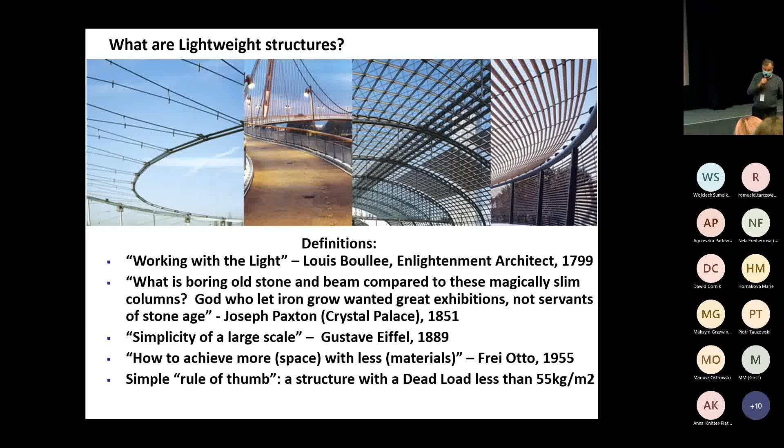A little bit of history: the theoretical paper was produced by architects in the late 18th century. The first building built with a steel frame was in 1877. Of course, there's the Eiffel Tower, built for the Paris exposition. The first building built with cables supporting a roof was in 1933, built in Chicago. And then, of course, there's a 4-point structure designed and built by Frei Otto in 1955, which weighs not even 5 kilograms per square meter.

So that was just revisiting what it means to be a lightweight structure. This presentation isn't about cable nets generally, but there are several types. This is a very simple orthogonal net where two layers of cables intersect in one plane.

Incidentally, if you look at this guy, he's not wearing any safety belts. This picture was done in the late 70s; the regulations on construction sites were a little different. Here you see the layout of the cable net prepared on the floor, on the ground, with all the nodes intersecting, ready for installation.

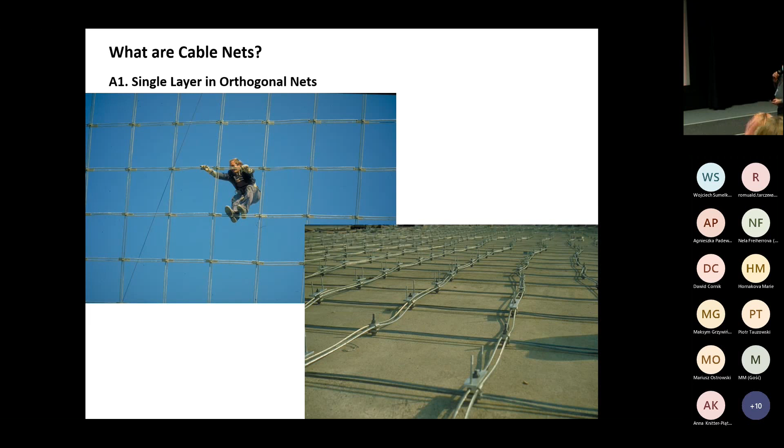The cable net, in this case, is for an ice skating rink in Munich, Germany. It is supported by a single arch, hanging from that arch, covering a space of 100 by 90 meters. That's one of the advantages of cable nets: they can span large distances with minimum dead load of their own weight and provide protection from the environment. This entire building is clad with the membrane, and it resists all the applied loads in Munich, including snow load.

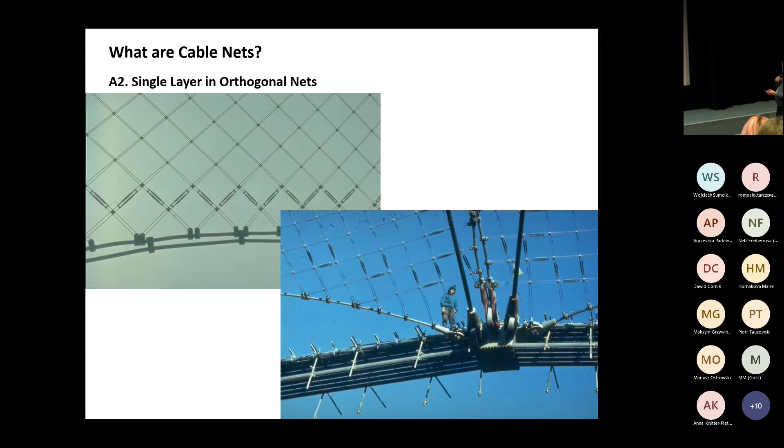The cable net could be formed, a similar concept of a cable net, but could be formed by boundaries of the catenary cables, which form totally different spaces.

Here's Munich Olympic Stadium. That was a concept design of Frei Otto, but he was not the engineer of record. Engineer of record was Schlaich Bergermann. This is the same building, shown during construction. Initially, it was clad with plexiglass panels.

What you see here, these darker lines, these are not cables. This is a joint between the individual plexiglass panels. Now there are polyethylene panels. The actual main supporting structure are these tiny cables with the upstands at the nodes, which support the roofing.

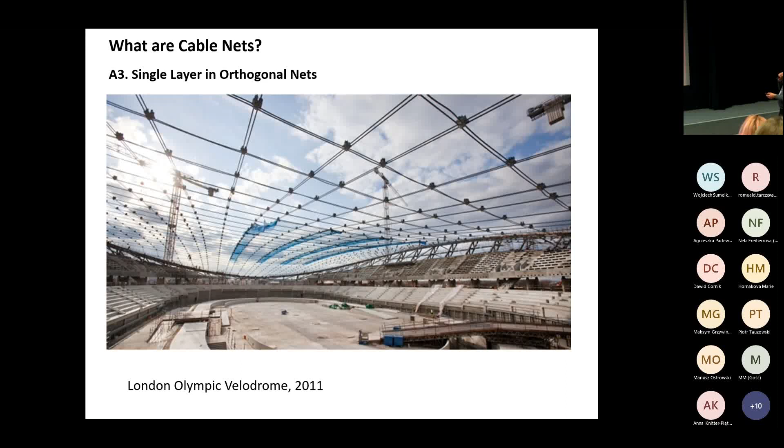Another example of a cable net, which forms a saddle dome, fully enclosed building. This is a velodrome for the London Olympics, completed in 2011. Again, you have the cables intersecting at the nodes. This is a picture during installation.

One other important aspect of any cable structure: cables have to be pre-tensioned. Cables with no pre-tension forces in them have no stiffness and no stability. What's more interesting is the higher the pre-tension in the cables, or the higher the tension forces in the cables, the more that increases the stiffness of the entire structure.

To the point that in order to reduce the deflection or deformation of the entire structure, you have to increase the pre-stress in the cables. The increased pre-stress of the cables equals the higher diameter of the cables. And then it affects the economics of the project.

So the design of the shape or form of the building, of the structure, is not the only answer to create an efficient, economical, lightweight structure, which is this example. Again, you see the intersecting cables with the node, which support the roofing. And here's the final building.

What's interesting about this one is that it was late development. The construction was late, but the date of the Olympics was approaching, and they had to build something. They had to build this velodrome.

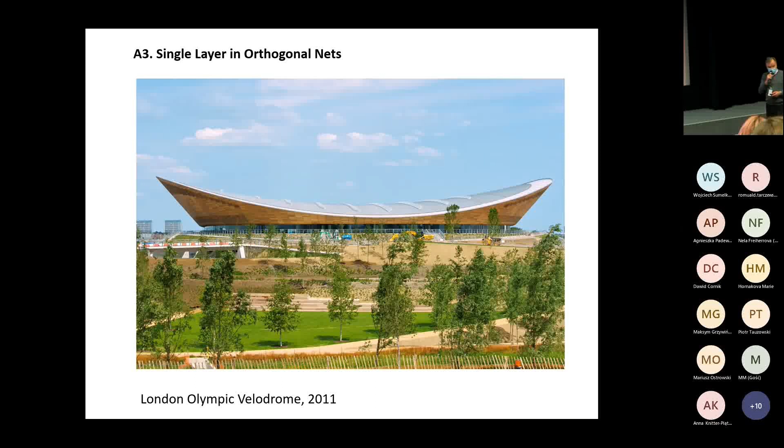The cable net, which was basically delivered to the site prefabricated and installed, was erected at one-third of the time schedule allowed for the traditional construction method, and was delivered at half price. These are the sort of pragmatic facts of the reality of life in the construction industry. Everything counts: time, money, and experience.

Here you see the picture of the inside. You hardly see the supporting structure, which are cables.

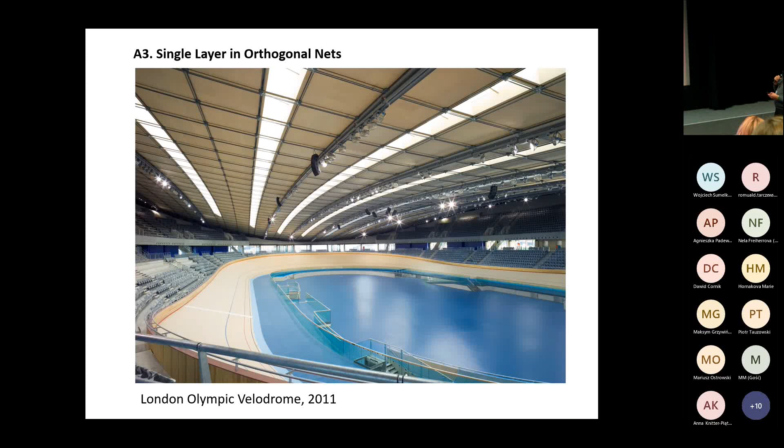It's another example. Here you have a cable net layout in a radial arrangement. It's called a bicycle wheel. It has a hub, it has the spokes, and it has a rim. In case of a stadium roof, you have a hub, you have the spokes, all working in tension, and you have a rim which works in compression.

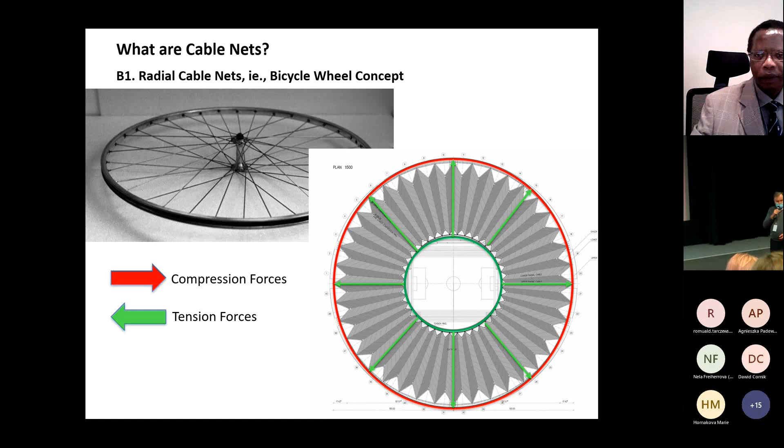If not for the wind, that would be a Tensegrity system, a large-scale Tensegrity system. Unfortunately, the wind doesn't want to blow from one direction and at one speed, and it does create reaction loads other than vertical on the system, so it's not a purely theoretical Tensegrity system.

Any applied loads, either uplift or downward, result in a different distribution of the tension loads or tension forces in the system, and sometimes very large deformations, very large deflections. For a stadium roof of the size of, say, 50,000 seats, the deformation - I'll show you on another slide.

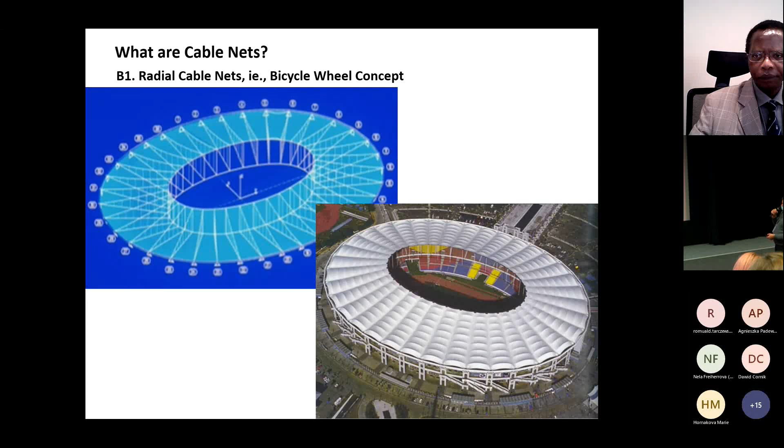Here's the system of a Kuala Lumpur National Stadium. Here's a compression ring, and here are two tension rings. This roof - there's no snow loads in Malaysia. But when the wind blows, depending on the direction, this roof deflects by 1 meter.

Here's a domestic example, Śląski Stadium in Chorzów. It's also a bicycle wheel. It has two compression rings. Here's one, and here's two, and here's the second. And this is a tension ring with the radial cable trusses.

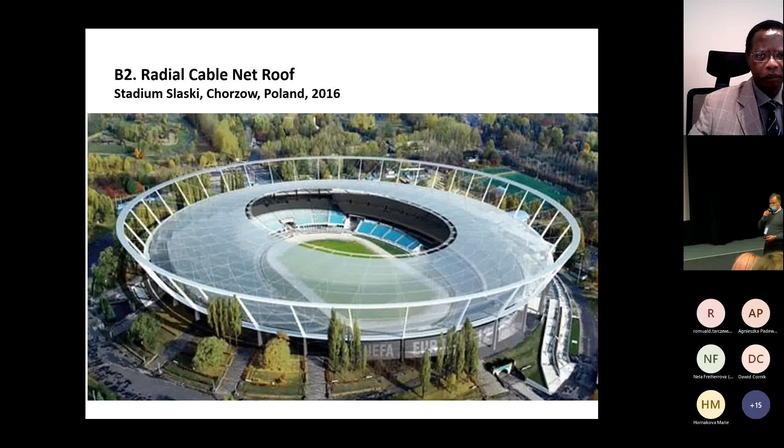This is how it was built. It actually was built twice. The second time was built right, actually. And this is after construction.

The radial cable net could also be a dome. Here's BC Place in Vancouver, Canada, which is designed with a retractable inside roof, which can carry the snow load. And the retractability, the mechanization works.

Which brings us to the subject of this presentation, which is double layer orthogonal cable net. Why is it different? The difference is that you have the top layer of cables, double cables, lower layer of cables, intersecting cables, and the struts connecting them. Such a system has the ability of carrying enormous loads over a large span.

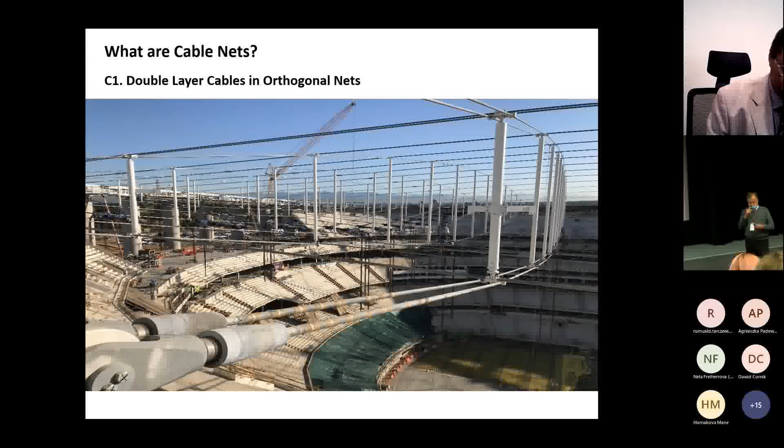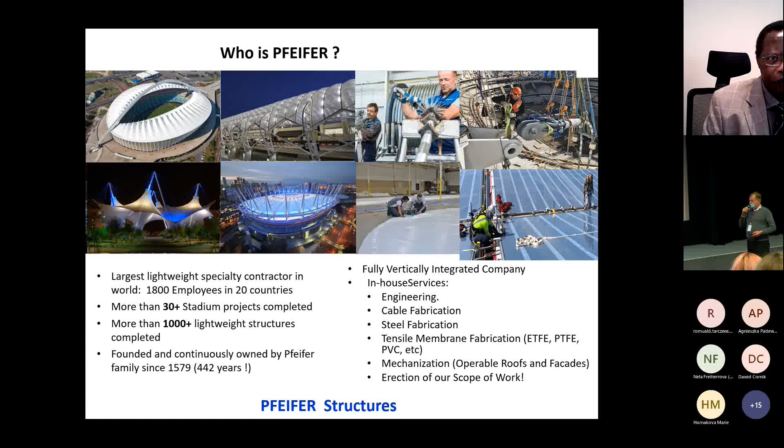And that brings us to the subject, who is Pfeifer? Pfeifer is a company who actually builds these things. Pfeifer has been building lightweight structures for 442 years. That's not a joke.

And what is the stadium? The stadium has been designed to be a center of entertainment, not just a stadium. This is located in Los Angeles, arguably the center of the world of entertainment. Hollywood is there, all sorts of film studios, and all the artists live there.

This space just over the stadium, that's a copy of an architecture model as it was designed. There's also an open plaza and the performance center for 6,000 people. Everything under one roof. This is the architecture model. This is a structural model. And this is when our company got involved and we actually were challenged with developing something that could be built.

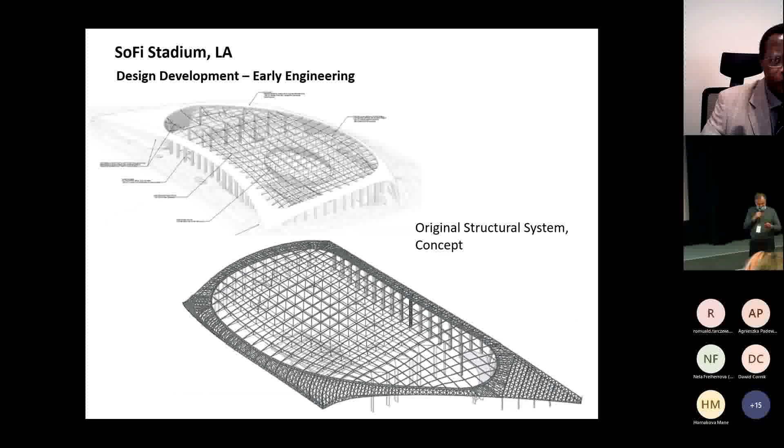So my quiz to you, my challenge to you is this. Can you tell me what the differences are between this model and this model? I'll give you a little hint. Remember what I showed you about the bicycle wheel? Okay, well, I'll wait for your answers after I finish, okay? So this is what we have built, analyzed tediously.

What adds to the challenge of this project is that it is clad with a single layer ETFE. ETFE is film. One of the mechanical properties of this film is it elongates 300% before it breaks. So if you start pulling on this film and you have a 1 by 1 meter panel, before it breaks, it becomes 3 by 3 meters. So does it snow in LA? No, but it rains. It could be torrential rains.

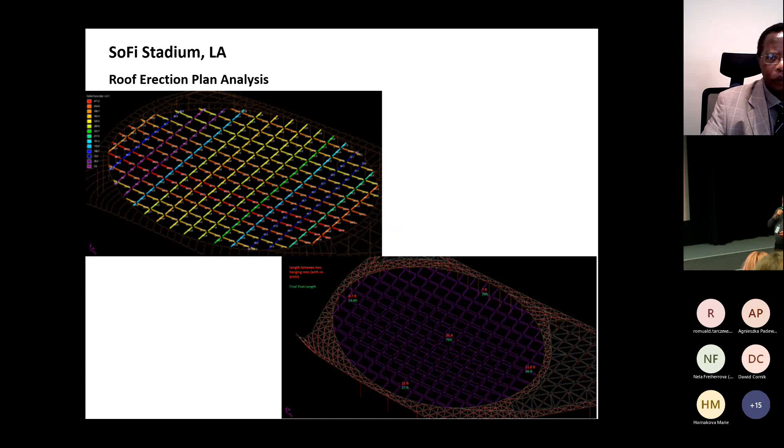Which led to the revision of the design of the entire supporting structure, which is a cable net, which resulted in a higher pre-stress, which would reduce the deformation and deflection, which resulted in higher tension in the cables, but it was a safe roof, which covers 8 hectares, I repeat. And then that leads to the detailing of the actual roofing, which is the film, the ETFE system, and the detailing of the entire roof, which of course is done again on sophisticated analytical programs, which calculate hundreds or thousands of load cases.

And then there's erection engineering. Designing the roof of any long span structure is producing the final picture of it. Now the erector, a company like ours, we need to figure out how to actually build it, how to install it and how to tension the cables. So here are examples of designing the temporary structures which allow us to lift the cables, then to pin them, and then to tension them. These strand jacks each weigh 3 metric tons, and they create forces of 1,000 tons each. These are the pre-stress forces which the cables on this structure required in order to be installed.

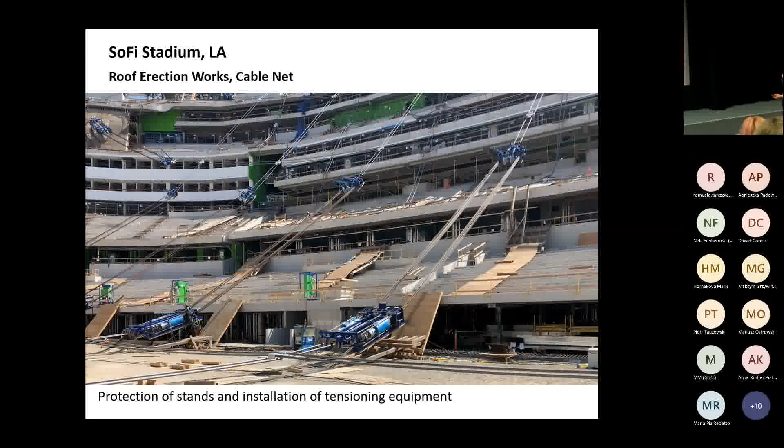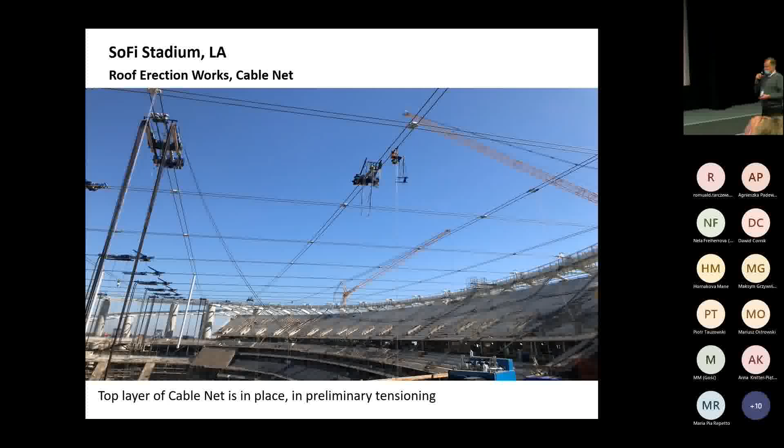The erection process starts with laying out the entire cable net on the floor of the building. As you see, the stadium is complete, it's built. Even the windows in some of the VIP suite boxes are in place. So we pin the cables. We start with the top layer because there's a lower level of tension in the top cable net. And then we install the lower cable net, and the final tensioning happens in the middle, at the tension ring. This is the apparatus which you saw in the other picture. And here's the completely tensioned cable net.

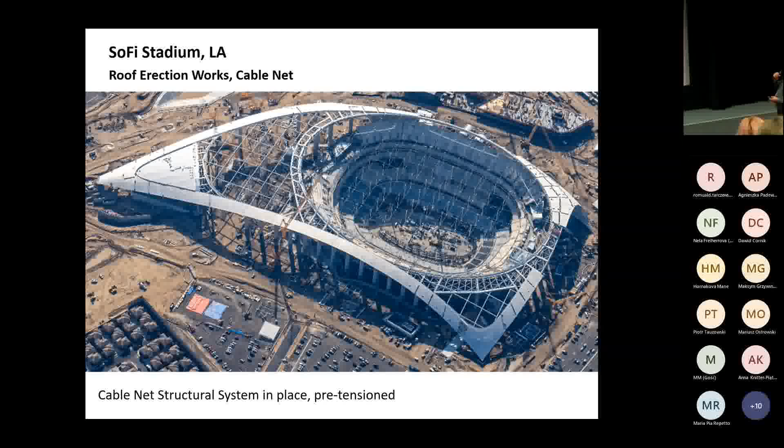Now, about the ETFE roofing system. This building is fully enclosed; it's not a dome because it's open on both sides, but because of the natural properties of the ETFE, there was a potential for huge heat buildup underneath the roof. It's like a greenhouse effect, which of course is not welcome, so it had to be eliminated. So the design called for operable ETFE panels. You see the almost 19 by 19 meter individual panels.

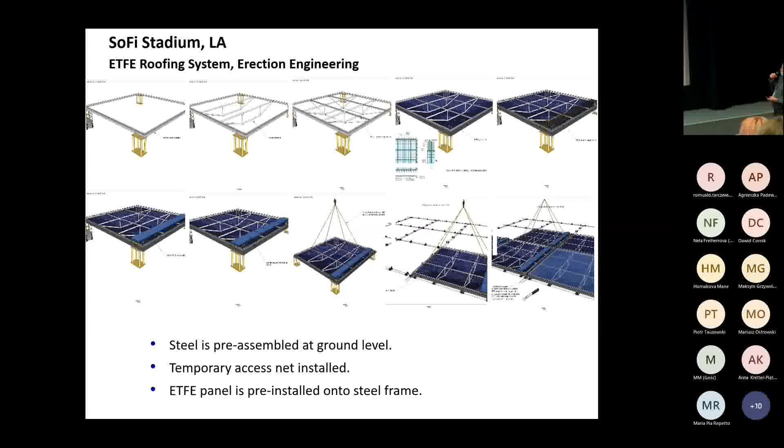Some of them had to be operable. Here is the mock-up of an individual panel. This is during the installation. And here is the mechanization of 16 of the panels, which had to open up with the ETFE on it automatically for natural ventilation, so as to prevent the heat buildup underneath the roof.

And this is how it was designed and eventually installed. And here's the stadium just before the opening game.

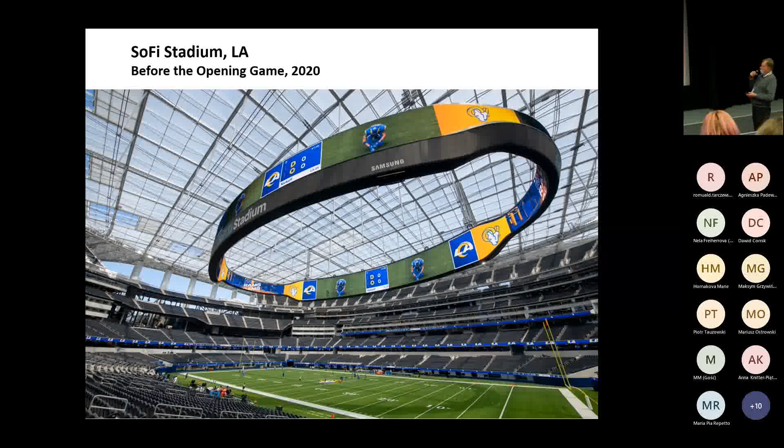In conclusion, what I would like to add to this presentation is this. We are all talking about the role of the architects, engineers as consultants on any project, starting from a small house through to a bridge or big stadium. What I would like to point out from this presentation is that the role of the builder, the executioner, the people who actually build this, can influence the design of a structure of the building, going back to square one, to the very beginnings, and presenting the need of reconsidering or revisiting what has been assumed by the designers, by the consultants.

The historical example of that, and I bring up Otto again because he is a forefather of the lightweight structures. When he started doing his models, producing models on the soap bubbles, and then started drawing them by hand, there was a person, a tent maker. His name is Peter Stromeyer in Constance, a small city at the south end of Germany, on the border between Germany and Switzerland. He was actually building this. Otto could never understand how these people knew how to compensate the material. Usually it was PVC, lightweight PVC material, to allow for the pre-tensioning during the installation and fitting the space that he had designed.

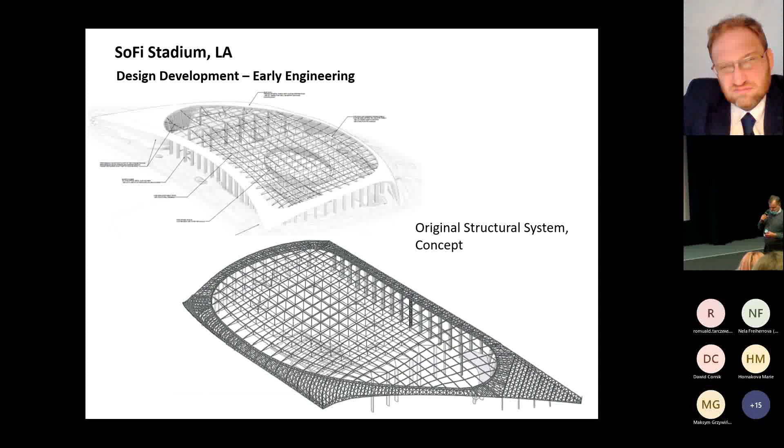The steel was failing. Why? Because there was nothing which would collect all of these tension forces, resist them in the form of compression, which is the hub of a bicycle wheel, and then would carry almost vertically. There are sliding forces, unfortunately, because of the wind, but it would carry all the resulting dead load forces to the ground through the columns. That is the fundamental difference. It may sound simple and silly, but this is what basically resulted in efficiency of the structural system for the huge roof and made it buildable. Thank you.

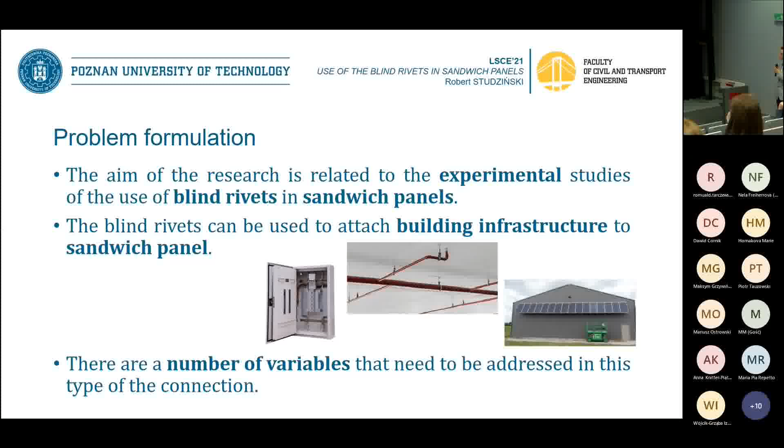So the pros and cons. The pros are ease of installation, no additional supporting structure, and no point thermal bridges. The cons: there are no practical guidelines, and there are no standard regulations so far. So let's go through the scope of the laboratory tests.

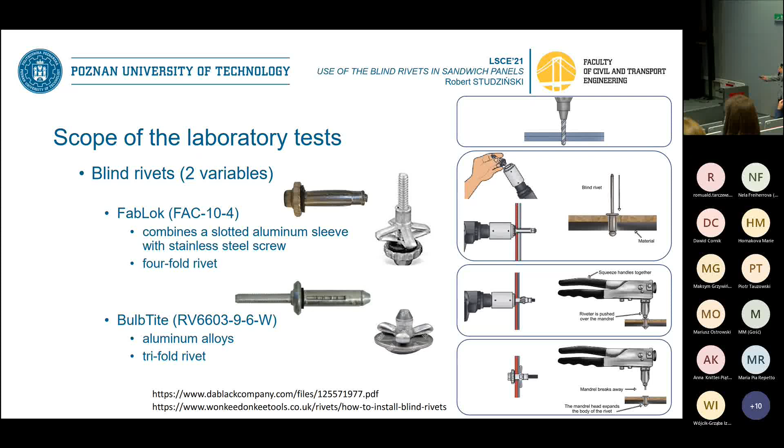I considered two types of blind rivets. They are characterized by almost the same diameter, and they are almost all aluminum, but the main difference is the number of folds. Here we've got 4, there's 3. The way of installation is quite similar. The difference is with the tools used. I mean, there is a riveter. Here we've got some sleeve on a drill or simply a hand wrench to install this FabLok. So on the right side, we've got the blind rivet. On the left side, we've got FabLok rivets.

I considered sandwich panels. Sandwich panels are composite structures which consist of 2 thin facings, with a thickness of about 0.5 millimeter, and a core which is made of soft materials with high thermal insulation properties. In the research, I investigated the use of steel and laminate. I investigated 3 types of core material: PIR foam, mineral wool, and styrofoam. And also I considered the lack or occurrence of a primer layer. The primer layer is applied at the external facings while the PIR foam is emerging. It improves adhesion between the facing and the core.

And of course, we should investigate a number of load types and load case scenarios. That's not all cases. I mean, I consider axial and eccentric load. The eccentric load was assumed by this eccentricity in the laboratory tests. Nevertheless, we should also investigate shear, but so far I didn't perform tests which will show the shear response of this type of connection.

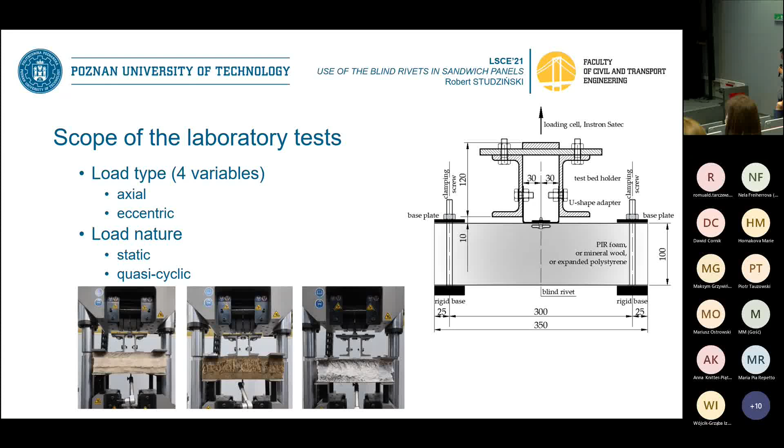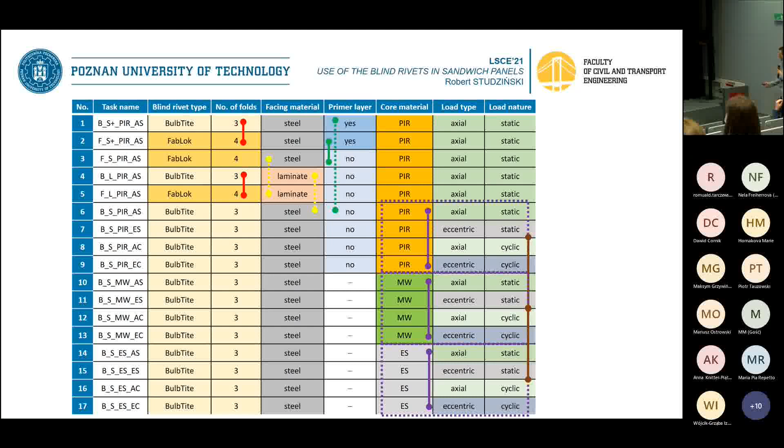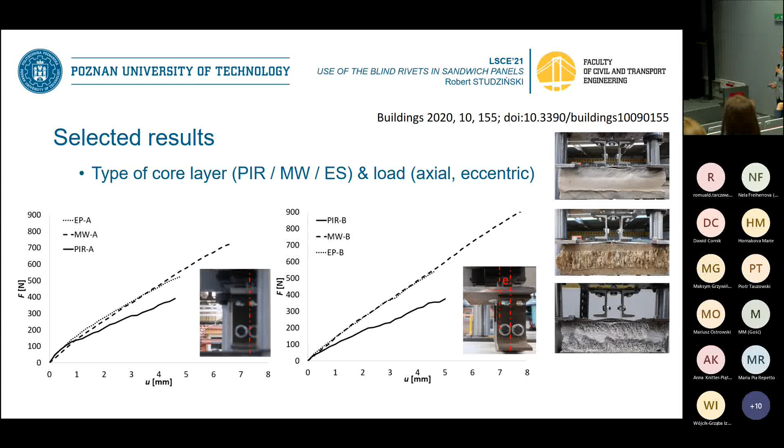Then at this slide, you see the differences between different core layers: PIR foam, mineral wool, styrofoam. It's also presented on the left side for axial pull-out, and here on the right side for eccentric pull-out. And what is observed, the angle of this load path was higher for the eccentric pull-out of these blind rivets.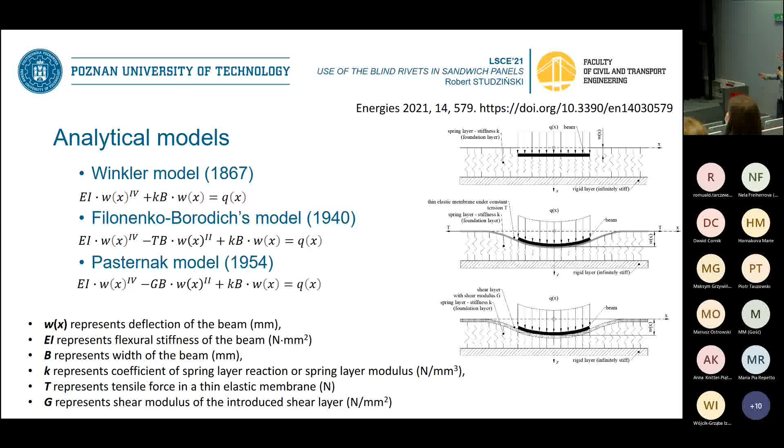And the last part of my research was connected with the analytical models. I tried to find some correlation, and I thought that I can use the simple, well-known models of beam on elastic foundation. I investigated Winkler, Filonenko-Borodich, and Pasternak model. Of course, there are some well-known assumptions of those models. Of course, I inverted this. I limited it to the point force and to the tension, not to compression.

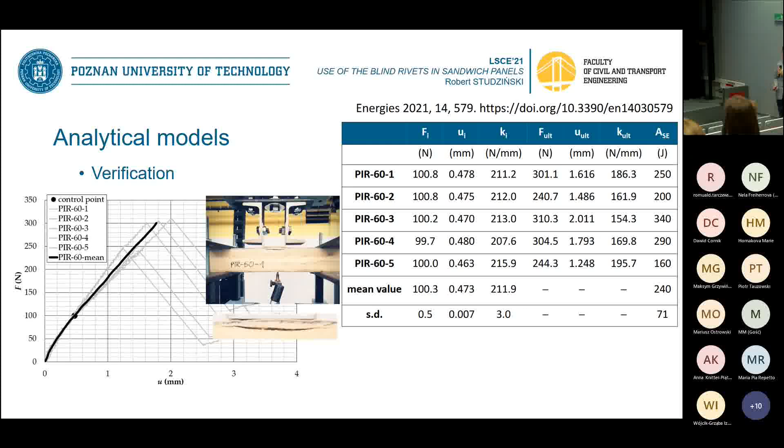And to verify these models, I performed some number of additional experiments, but this time the samples were beams. In fact, the width of this sample was not 250, but only 60 millimeters. And I tried to find that for the elastic range of the response of this connection, I will be able to correctly predict this behavior using these analytical models. So I chose 100 newtons force, and that's the result of it.

I mean, this is a simple numerical model. This line, 0.473, refers to the experiments, and the other lines refer to the analytical models. The results are quite close. And to conclude, the use of the primer layer increases the ductility of the blind connection. I observed that the use of 4 instead of 3 clamping arms increases the stiffness of the blind connection.

It was observed that the stiffness of the blind connection is the same for sandwich panels with mineral wool and expanded polystyrene cores, while in the case of PIR foam core, it's lower. It was also revealed that the eccentric load, regardless of the sandwich panel core layer material, increases the stiffness of the blind connection. Quasi-cyclic load has no negative influence on the mechanical response of the blind rivets, and it was found that all presented analytical models allow for description of the elastic range of mechanical response of the pull-out test of the blind rivet from the sandwich panel.

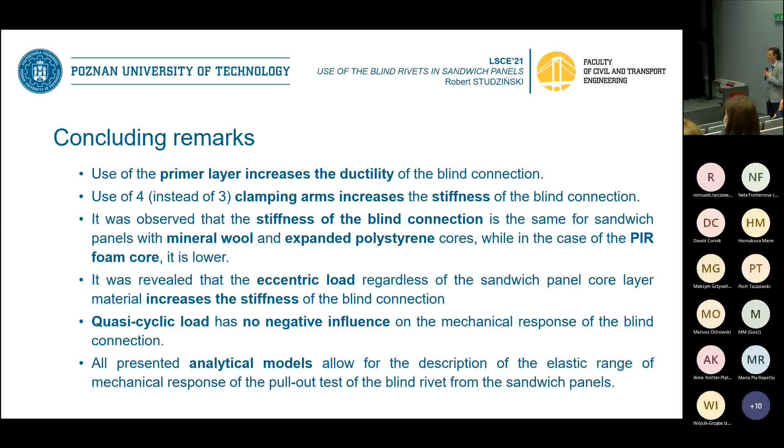And at the end, some future outlines will need to be covered. It should be considered the determination of the shear strength of this type of connection. We should consider the cyclic tension compression load cases because it could be crucial for this type of connection. We could extend the analytical formula for 2D model for the plate. And it should be also considered the influence of the suspended load on the overall sandwich panel capacity.

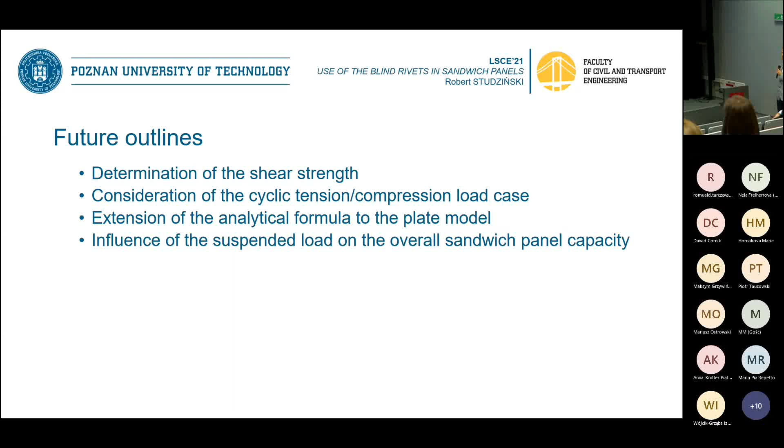Thank you very much. The paper is now open for discussion. Maybe you have any questions to the author? Any comments, maybe? Or criticism?

If not, I would like to say that it is very attractive for people from reliability analysis that you provide mean values and standard deviations for material properties, because it is usually hard to find these statistical parameters in any paper from the experimental analysis area, but they are necessary to provide reliability index computations. Okay, fine, thank you very much.

Okay. Right now we would have a very interesting, particularly for me personally, lecture by Ileana Calotescu from Romania, I hope. Full-scale behavior of a telecommunication lattice tower under wind loading. The floor is yours. Thank you.

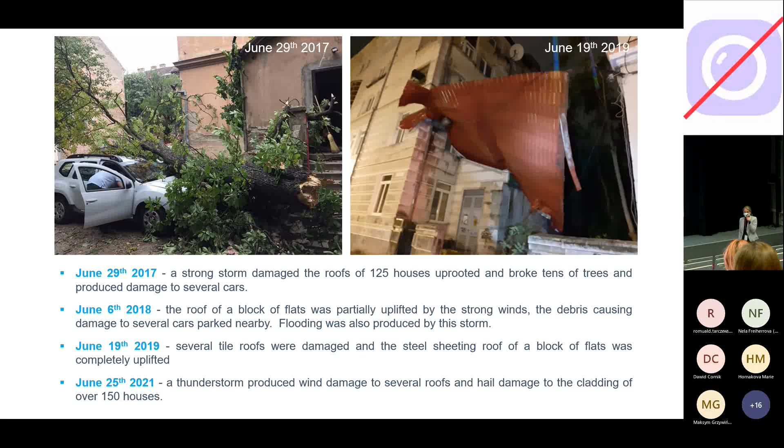This tower, as I said, is 50 meters in height. All the elements have circular hollow cross sections. Bracing patterns vary along the height. We have 10 segments, 7.5 meters at the base and 2.3 meters at the top. It's a triangular lattice tower. The geometry of this lattice tower is very common for Romania. Most of them are like that.

Related to the monitoring system, first of all, I would like to speak about the entities that are involved. First and foremost, University of Genova, who supported this research. So they offered the grant, the money, in order to be able to buy all this equipment. Technical University of Civil Engineering in Bucharest, Romania, where the monitoring system is actually installed.

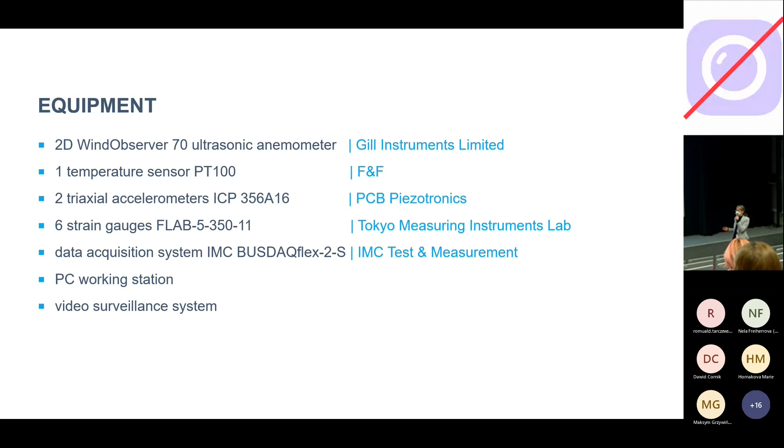So what is the equipment that we have? First of all, an ultrasonic anemometer, which is installed at the top of the tower, a temperature sensor, 2 triaxial accelerometers, 6 strain gauges, a data acquisition system, of course, the server located at the university, and we also have a video surveillance system, because my dream was to see the clouds when thunderstorms happen, which actually is very helpful to decide between events.

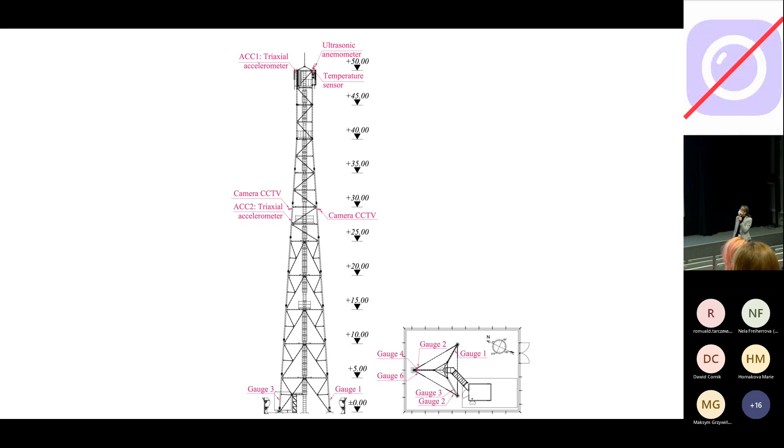This is the geometry of the tower with the installation of each sensor. So at the top we have the anemometer and the temperature sensor. We have one accelerometer at the top, another one at about 27 meters. And all the strain gauges were installed at the bottom, 3 on the legs and 3 on the diagonals at the base. Initially, we wanted to install one strain gauge also higher, at about 40 meters, but we gave up because it's too difficult.

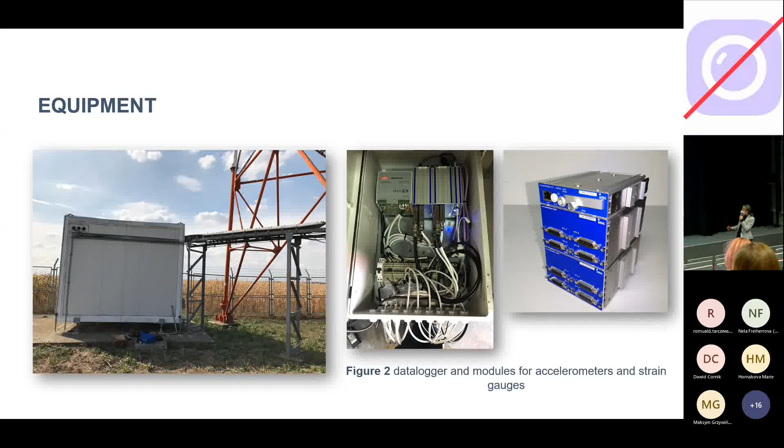This is the data logger, which is installed in the shelter located at the base of the tower, with all the channels for each sensor. And this is the PC working station in my office in Romania, where we gather all the data, which is then weekly transferred to Genova University.

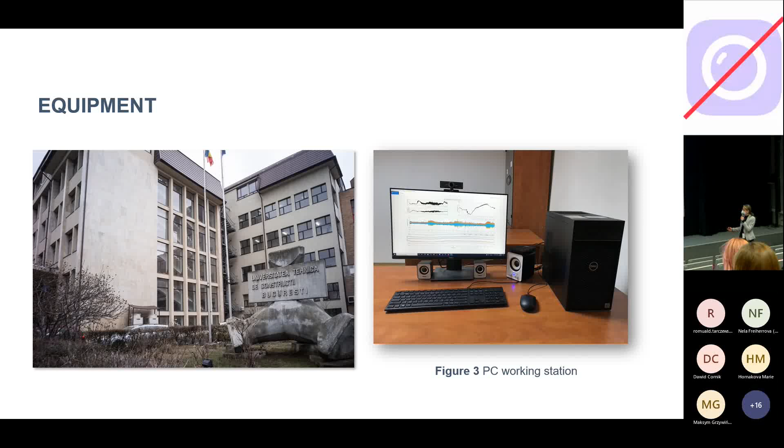Data acquisition is done using the IMC Studio software, which comes with a data logger, and then we have other software for data transfer and then to read the data.

This is more or less how the database looks like at this step. We have 1 minute of data, which is transferred from the data logger to the computer, and then we create a 24-hour MATLAB file for each day, which looks like this. I would like to thank Li Xiao at the University of Genova for writing the script to get the 24-hour MATLAB files like that. You can see measurements of wind speed and direction, temperature, accelerations in the middle, and strains at the base.

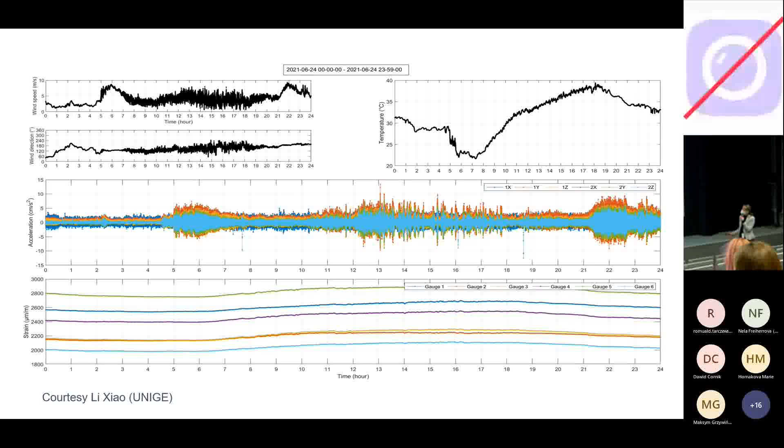So when you read about wind velocity, they always say it's a Gaussian stationary event. Trust me, in almost 1 year of measurements, it's very difficult to find a Gaussian stationary event from wind velocities measured on site.

But we found one on May 18th, 2021. You can see the gust factor is 1.27, a bit smaller than the one provided in the code. We do have some other events that occurred after I wrote the abstract for this conference, for which the gust factor increases a little bit.

So you can see no change in direction at all. Change in direction is sometimes representative of a thunderstorm. Average wind velocity in 10 minutes is 11.6 meters per second. You see also the distribution, which looks very much like a Gaussian distribution.

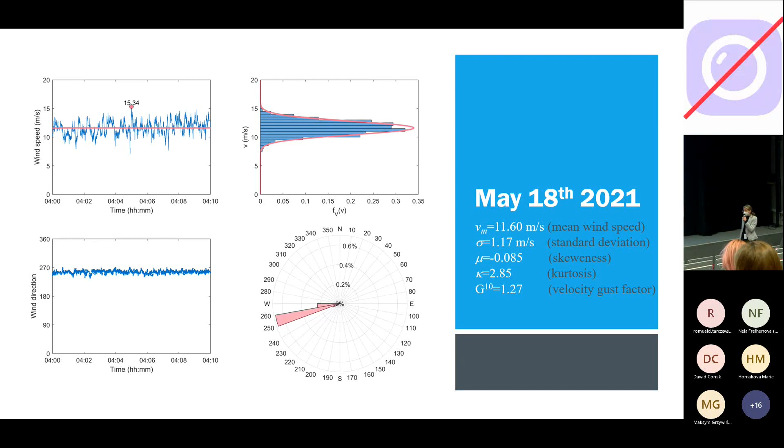Related to the response characteristics, I'm only presenting here the acceleration data. The accelerometers are placed with Y and Z directions. Z direction is parallel to the face of the tower where the strain gauges are. We have two diagonals at the base, and the face with the two diagonals is the Z direction of the accelerometers, and Y is perpendicular.

You can see here that the first mode of vibration, the first frequency of vibration, is really well identified from the acceleration data. The torsional one, the third mode, we don't see a peak. I suppose the next ones may be the flexural modes of vibration. And then we have this peak around 7 hertz, which I'm not sure if it really belongs to the torsional mode or not.

Here are all the other plots corresponding to both directions for the accelerometer at 50 meters and the accelerometer at 27 meters, and they all identify these peaks. Of course, these are preliminary data. We are just now starting to study also the strain measurements and get the complete response of the tower, both for synoptic events and also for thunderstorms, which is actually the main purpose.

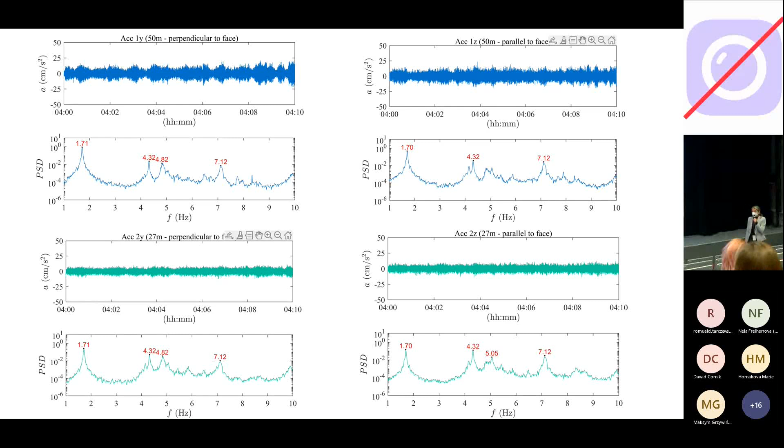Instead of conclusions, I would like to acknowledge first and foremost Professor Giovanni Solari from University of Genova, who sadly passed away last year in November, to whom I owe all my career in wind engineering. He had a love for wind engineering, and he had a love for students, and he helped everybody, all young people. He loved young people a lot, and he always offered his help if he saw you needed it. This project was researched mainly because of him, because he believed in what we can do here in Romania. So I would like to thank him. Maybe he can hear me also now.

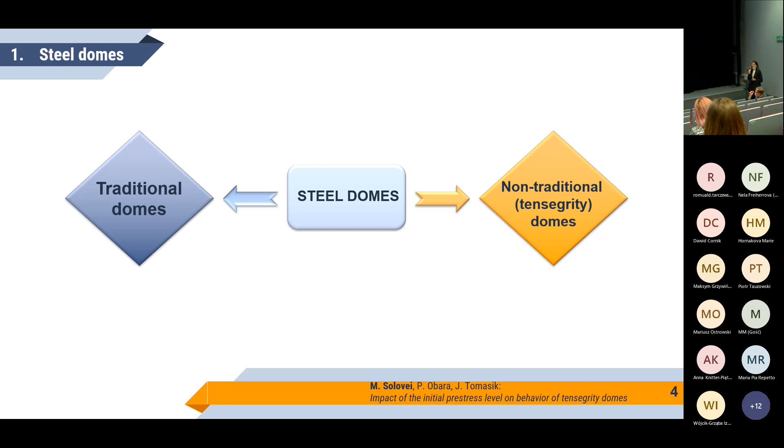The traditional steel domes can be divided into classic mesh domes, consisting of only one layer of rods; multi-layer mesh domes, consisting of two or more layers of rods; and cable net domes, which consist of cables and struts. However, the cables are the main structural elements.

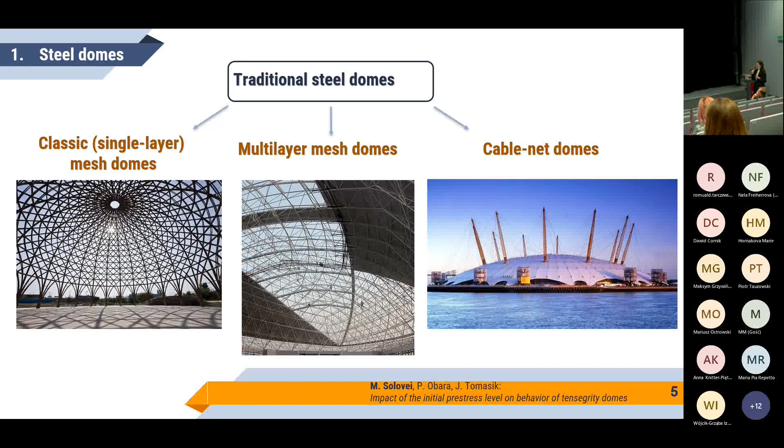The non-traditional or tensegrity domes were first mentioned by Fuller, who presented the geodesic dome, the first known structure with tensegrity features. Of course, the next researchers presented other works based on Fuller's.

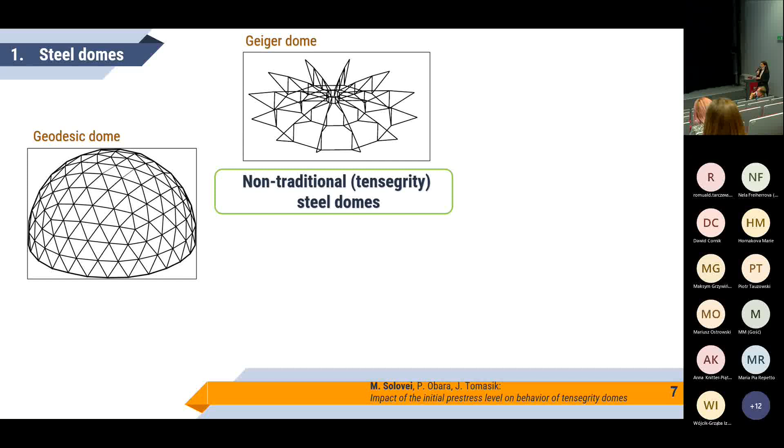Geiger presented his structure of dome, which consists of cables and struts in a state of self-stress. Levy modified the Geiger dome by adding extra cables. Kiewitt was inspired by the lamella lattice shell, and of course there were others.

Now, what is tensegrity? Tensegrity systems have a unique rod-like structure. They consist of compressed elements that are separated from each other and tensed elements that create a continuous net.

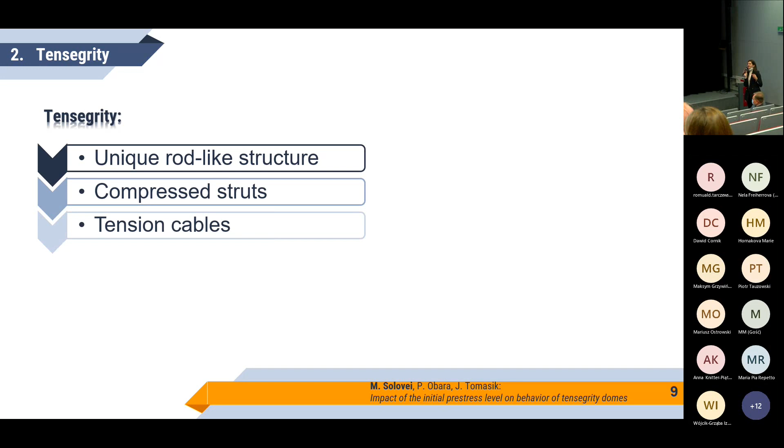These structures are in a continuous state of self-stress, which reduces the infinitesimal mechanisms that also exist in these structures. An example of tensegrity is the work of Kenneth Snelson, Needle Tower.

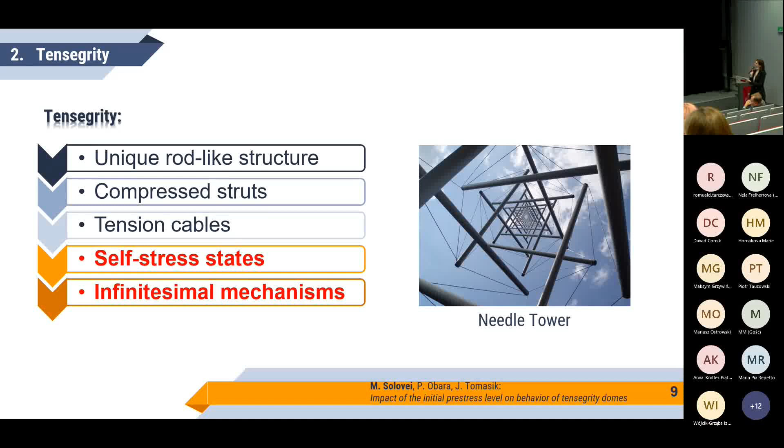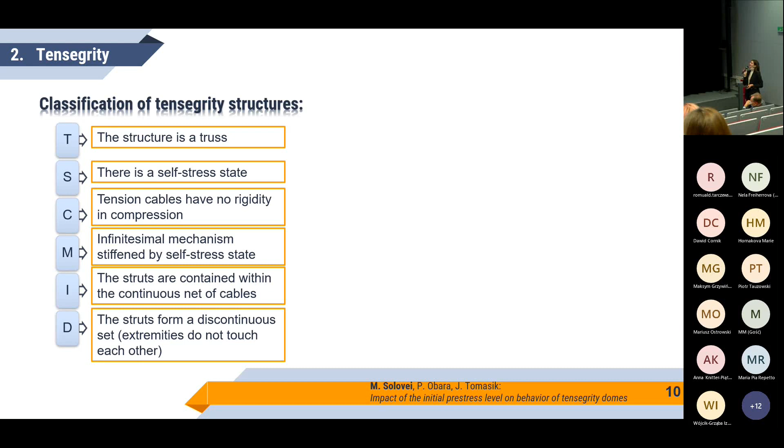Tensegrity structures have 6 characteristic features that are listed on the slide. According to these features, the structures can be classified as ideal tensegrity, pure tensegrity, structures with tensegrity features of class 1 and 2, and others. Besides this classification, the first 3 classes are characterized by the infinitesimal mechanism, while the last one is not.

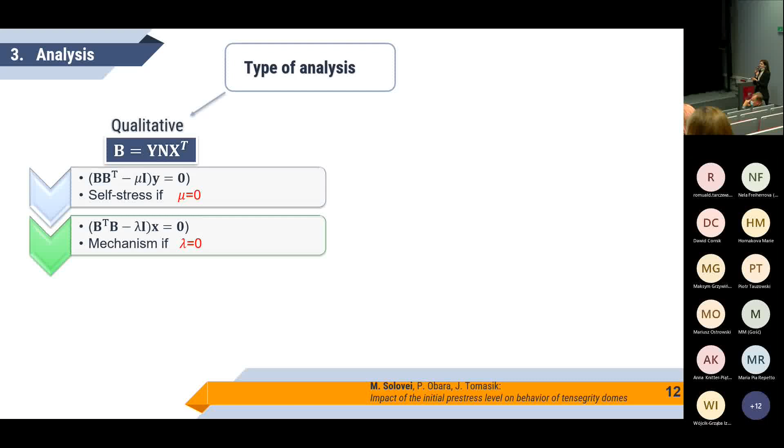A complete analysis of tensegrity structures is a two-stage process. The first stage is qualitative analysis, which can be done through the singular value decomposition of the compatibility matrix B. According to this analysis, the self-stress states and mechanisms are determined, and the classification of the structure can also be described.

The second stage is quantitative analysis, which can be done through the quasi-linear theory, second-order theory, or third-order theory. According to that, the S-min and S-max values are determined, and also the impact of self-stress on the displacements, the load-bearing capacity, and the global stiffness of the structure is considered.

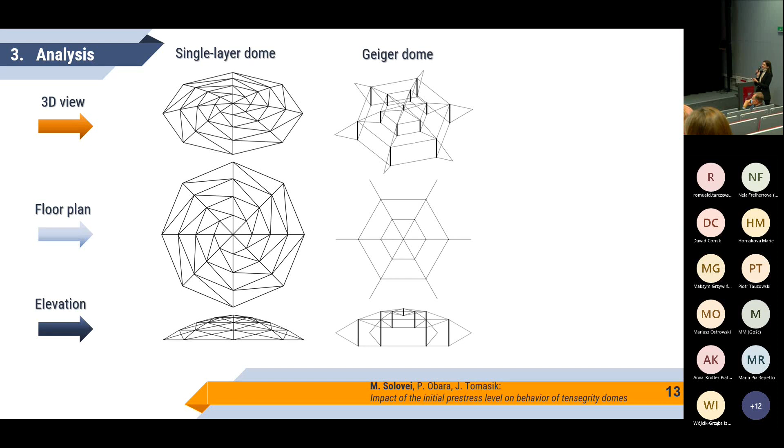In our work, the following structures were analyzed: the Schwedler single-layer dome, which consists of only struts; the modified Geiger dome, which had 6 load-bearing girders and additional horizontal cables; and the original Levy dome, which consists of 6 load-bearing girders, with cables creating a triangular net. All 3 domes were 20 meters wide and 3.5 meters high, measured from the supports.

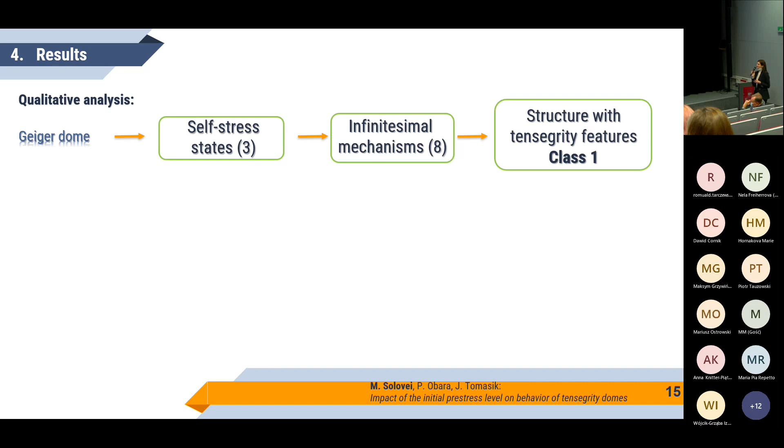For the results, during the qualitative analysis, self-stress states and mechanisms were discovered in the Geiger dome, classifying it as a structure with tensegrity features of class 1. However, the Levy dome had no mechanism, classifying it as class 2. The single-layer Schwedler dome has no tensegrity features, so it cannot be considered by this analysis.

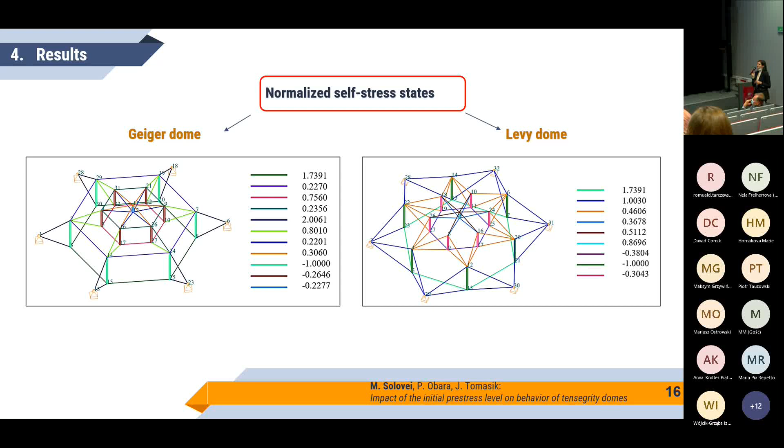Here are presented a normalized superposition of self-stress states for the Geiger dome and Levy dome. The forces in the elements were normalized so that the maximum force in the struts was -1. Here we can see 2 types of loads that were analyzed: asymmetric and symmetrical.

Here is shown the impact of prestress level on displacement qz for the Geiger dome for both load types, according to the second-order and third-order theories. As we can see, at a low level of self-stress, the second-order theory was insufficient. However, with an increase of self-stress, the results for second and third-order theories became comparable, almost the same, for the Geiger dome.

For the Levy dome, the same analysis was performed, and we can see that the level of self-stress state does not affect the displacement according to the second-order and third-order theories—it remains constant throughout. For the single-layer dome, the same analysis was performed, and the displacement of the node was comparable to the Levy dome, as shown in the pictures.

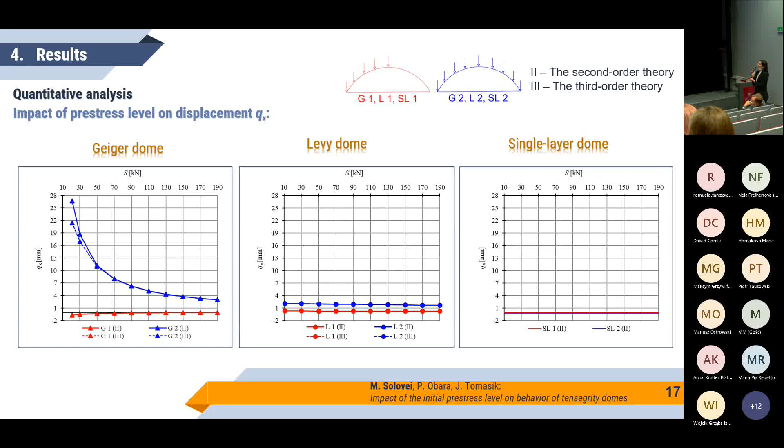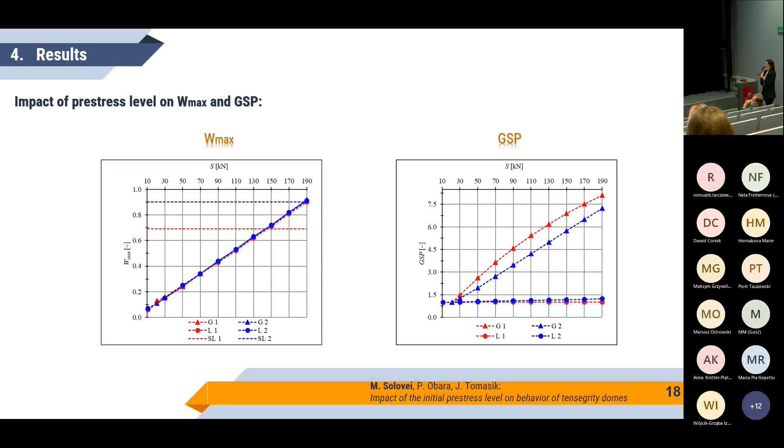However, for the single-layer dome, it is constant. In the case of the global stiffness parameter, it's still almost linear for the Geiger dome, but it is constant for the Levy dome. The single-layer dome was not considered in this parameter.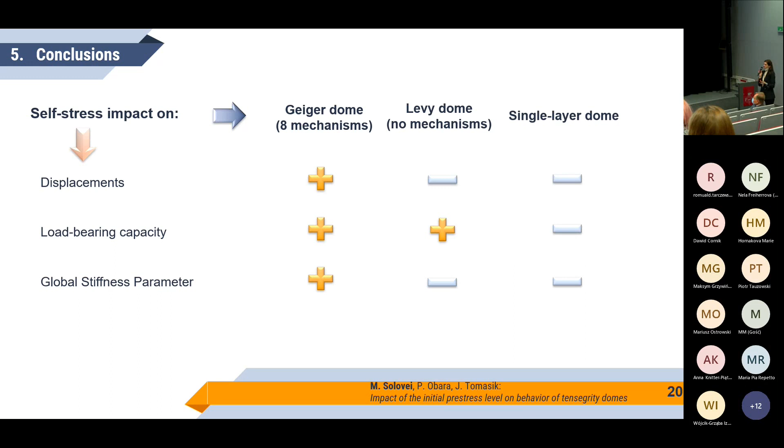According to the conclusions, I would like to summarize the main points of the presentation. The self-stress impact is on each static parameter of the Geiger dome, only impacting the load-bearing capacity of the Levy dome, and the single layer dome is not considered because it has no self-stress. In the end, we can compare the behavior of each dome according to displacement, where we see large displacement for the Geiger dome and small for the Levy and single layer.

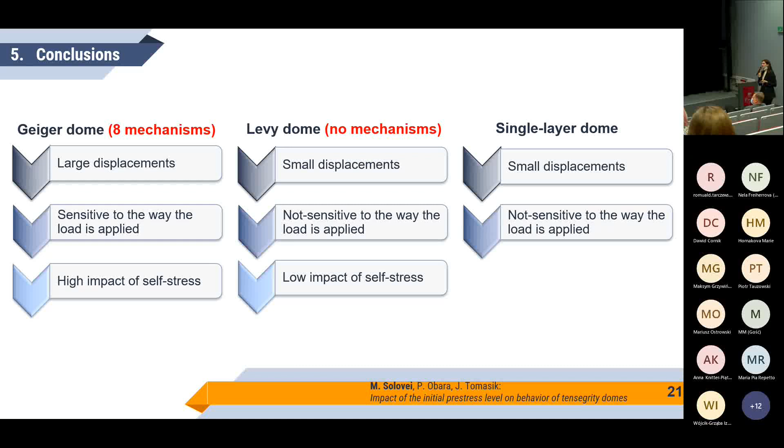The impact of the load shows the Geiger dome is sensitive to load while the two others are not. The impact of the self-stress level on the tensegrity domes is high for the Geiger dome. In conclusion, the level of self-stress impact on the tensegrity structure only occurs if the structure has a mechanism or infinitesimal mechanism, because otherwise this impact is minimal.

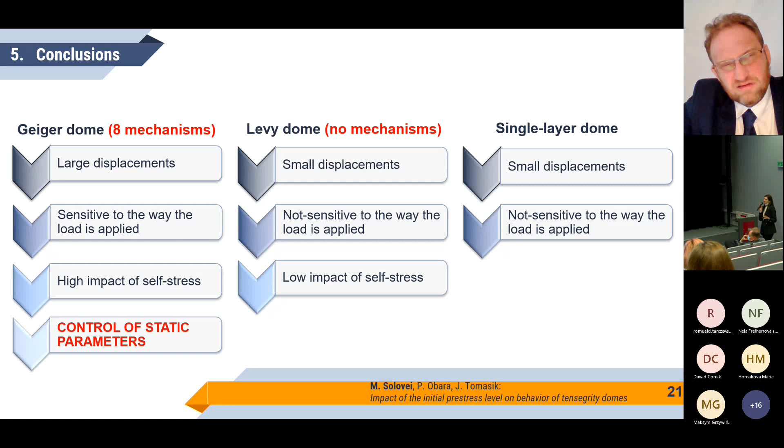So we can say that in our work, the best dome was the Geiger dome because it was able to control the static parameters of the dome, which is better and useful in designing the structure. This is the end of my presentation. Thank you.

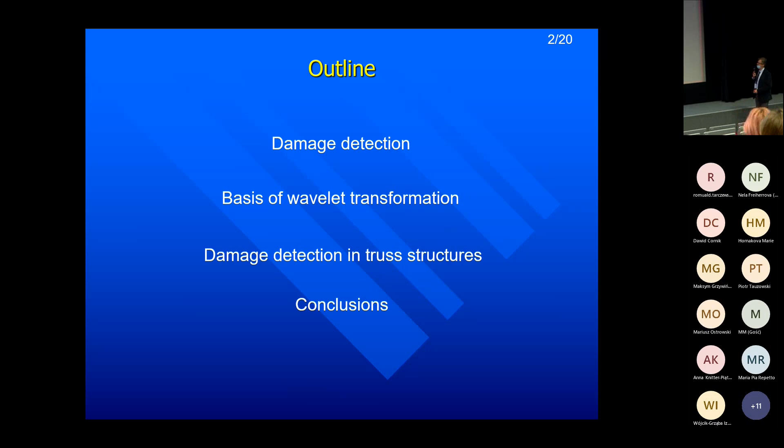This is the outline of my presentation: what is damage, can we define damage, the real basis of wavelet transformation, and generally damage detection, how to do it here in truss structures, and very simple conclusions.

What is damage? It is cracks, voids, inclusions, delaminations, and for example stiffness reduction, and here the damage will be imposed by the stiffness reduction. And what we should do? Generally, here we should resolve this structure - resolve meaning to solve the static problem of flat truss structures.

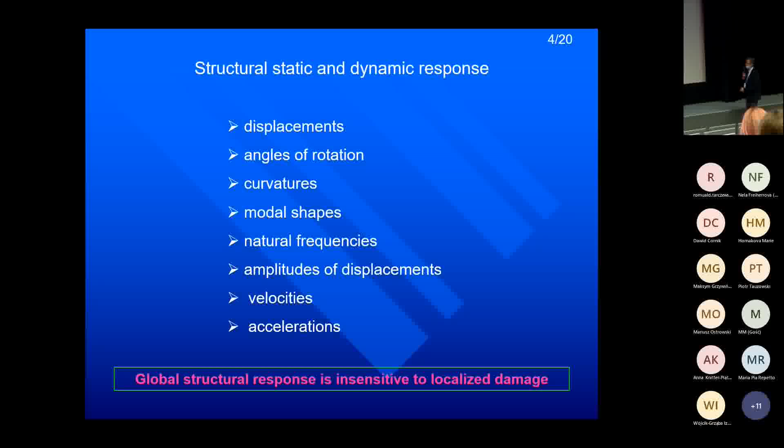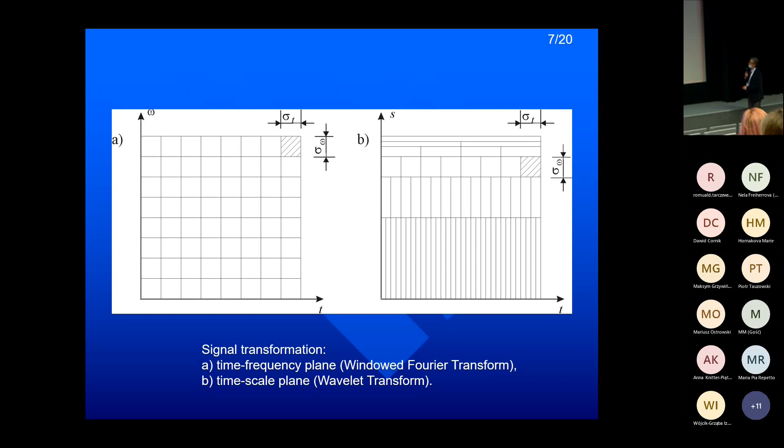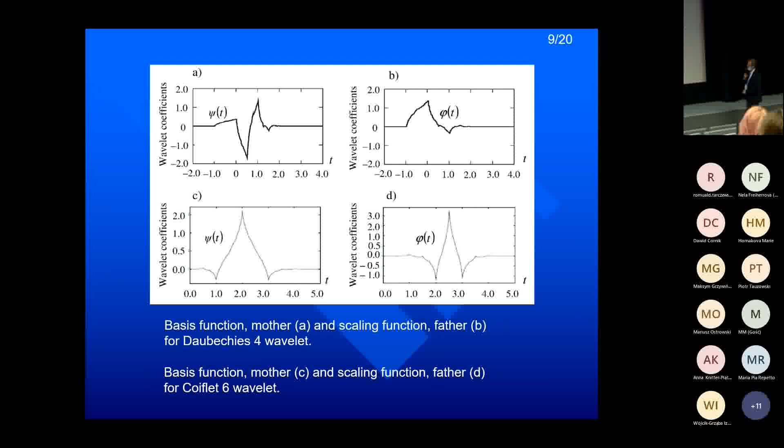And this is an example of the simplest wavelet family. The most useful in our analysis are the Daubechies 4 and Daubechies 8 wavelet families. Also very useful is the family which is called coiflet. And one of the main points of this analysis is the Mallat pyramid algorithm.

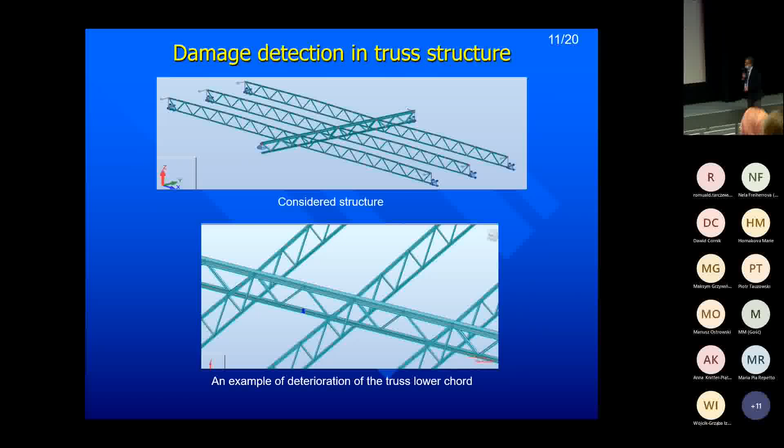And to resolve the statics of this, the classical computational program of the finite element method, Robot, was used, and two-node spatial frame elements were imposed. And here we have the properties of our structure. And next we have real loading.

This analysis was a part of a real process of designing the structure, and we use it, for example, to prognose some weakness inside the structure. And this is real external loading. And now we can observe how this damage, this reduction of stiffness, was introduced.

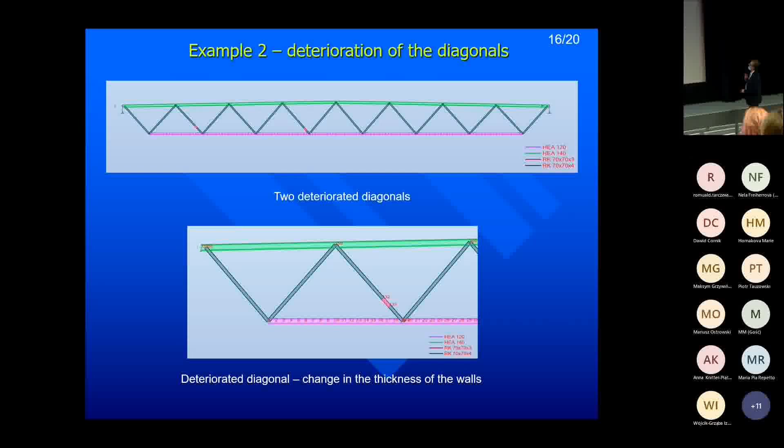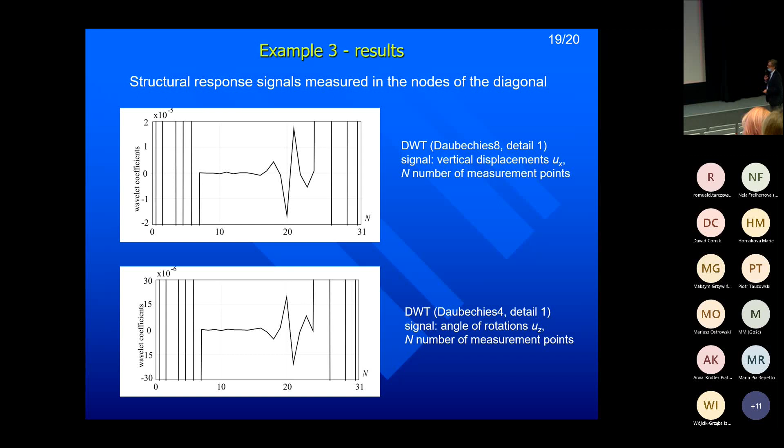And now, for example, the last, if we measure the nodes of the diagonals, and of course we can discuss if these are really good results, but generally we can conclude after discussion that these two families of wavelets indicate this damaged part of the structure.

And at the end, some conclusions. Of course, the input signal, the response of the structure, can be any signal. It could be not only the line of deflection in discrete form, but of course the angle of rotation, stress, strain. It can be any signal, but there is a main question: what is the most engineering signal in a real structure? Which signal can we measure? And that's why I said that here is a little bit of an academic problem.

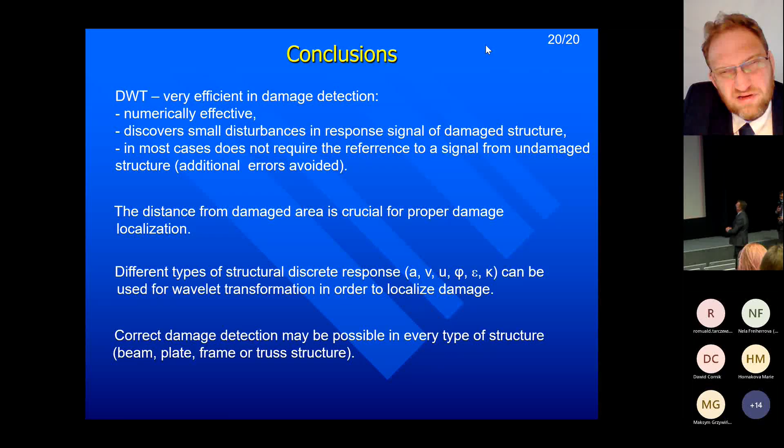But thank you for your attention, and thank you that I can present our results. Thank you. I can say that my first lecture about wavelets was the lecture of Professor Kamiński during ECCM 2001, and I was an assistant and was at your lecture. Thank you very much. I totally forgot this lecture.

Nevertheless, maybe you have some questions, but before this, I would like to make a comment. There was the abbreviation MRA. MRA is multi-resolution analysis, which is very important in multi-scale modeling. There are a lot of papers in the literature about multi-scale analysis using the finite element method. In the multi-scale approach, there is a huge number of finite elements. Everything must be very carefully discretized. If you use the MRA approach, with wavelet analysis, it is not necessary to provide such a detailed discretization. So that is much better.

Daubechies is after the mathematician Ingrid Daubechies. She is somewhere in the United States, I don't know where, but in wavelet analysis theory and description, there are some pictures where wavelet analysis is used to smoothen and to make some edges very, very sharp. So to process pictures, that is very important.